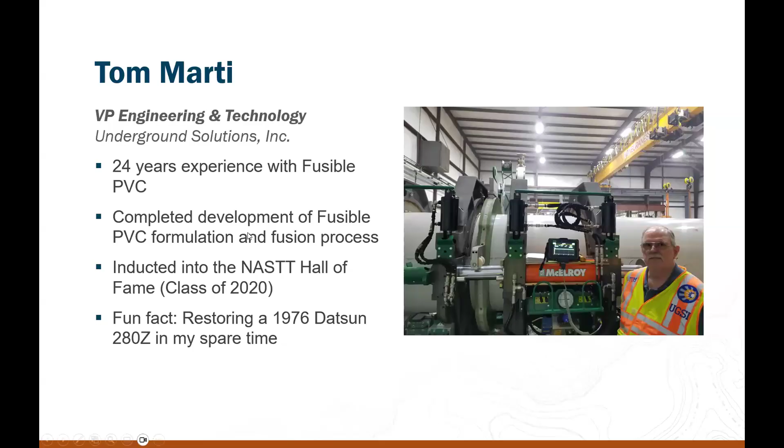Okay, next slide please, April. Tom's also with us. He's Vice President of Engineering and Technology, Tom Marti with Underground Solutions. 24 years of fusible PVC experience, a lot of technical expertise there. He's in the NASTT Hall of Fame, and he's restoring an old Datsun 280Z. That's really cool, so we're excited to have Tom with us.

Michael Garrett is a construction manager with Underground Solutions. First, I guess, is that Michael, is that your first installation? Was in 2006?

Oh, you're on mute. I'm guessing that was your first installation there. So he's been doing this a while. He's from Ireland and plays pickleball.

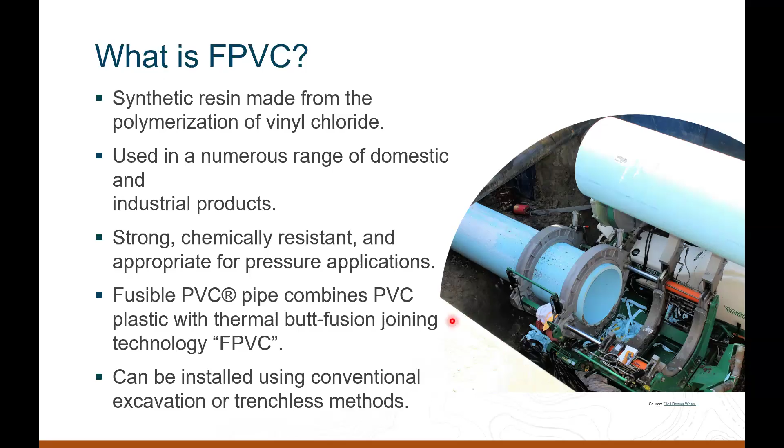So current trenchless applications when it comes to PVC: most applications, if not all, currently are in tension. PVC pipe has over the last 20 years been installed, whether via HDD or sliplining or other installations. It is pretty well established when it comes to its tensile strength capabilities. Most recently, HDD installation and slipline projects of over 7,500 feet in length.

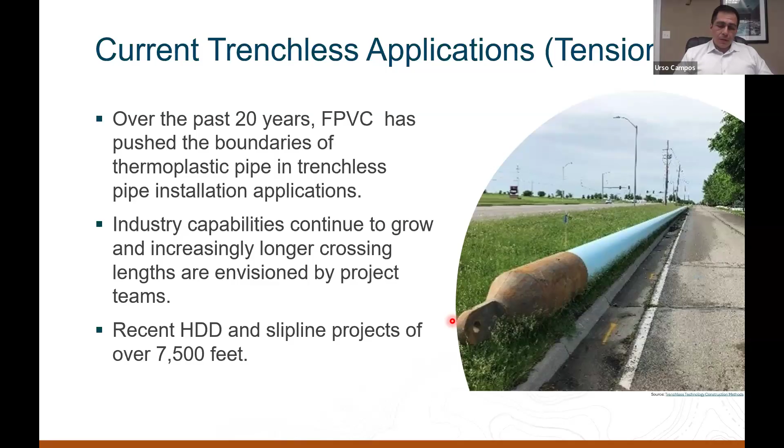So the reason why we're doing this is we know PVC pipe can be pulled, and now we want to push its limits and see if we can actually push it to explore its applications, not only in HDD or sliplining applications, but also in microtunneling, direct steerable pipe thrusting or direct pipe, and also whether a direct pipe thruster can be used in pullback assist HDD applications.

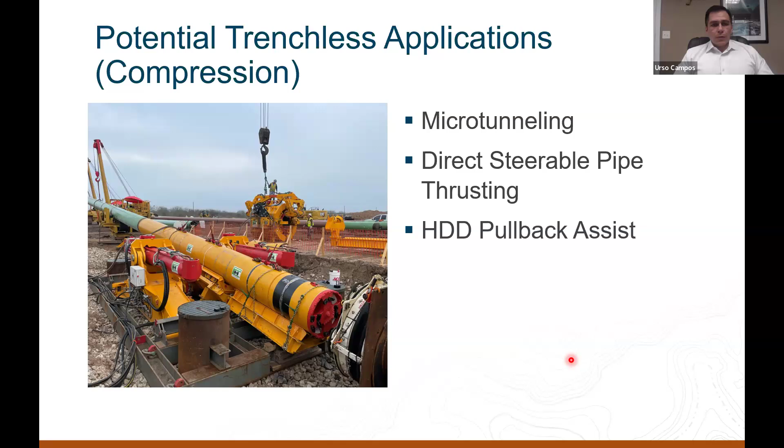So some of PVC's mechanical properties: safe pull stress, 2800 psi, that's again pull and tension. Its yield strength, 7000 psi. Modulus of elasticity, 400,000 psi. Poisson's ratio, 0.38. And when it comes to HDD applications, its recommended bend radius is 250 times the diameter of the pipe, in inches.

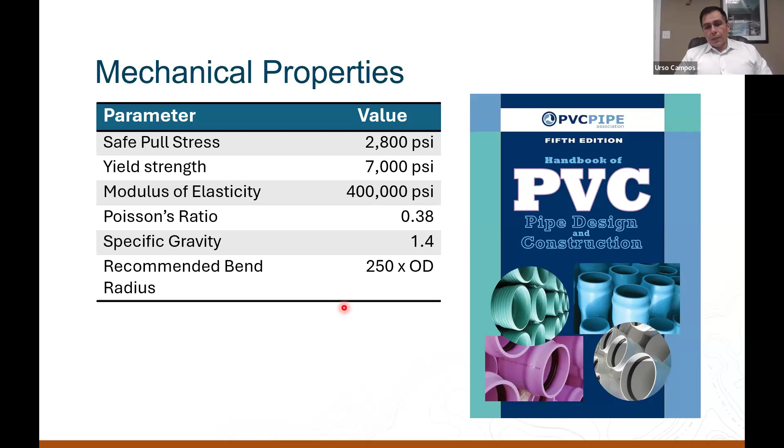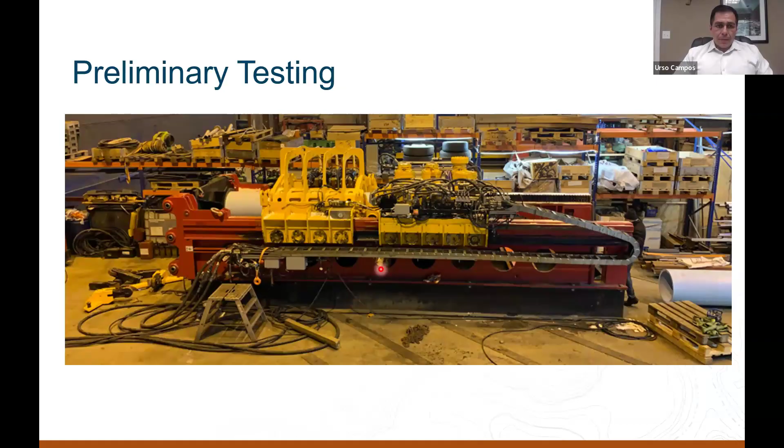As I mentioned earlier, Underground Solutions had already conducted some preliminary testing. They've conducted, as you can see here, full-scale testing of a PVC pipe sample in compression. They've also tested not only the compression of the pipe in its longitudinal direction, but also compressing the pipe using the pipe clamps of a direct pipe thruster.

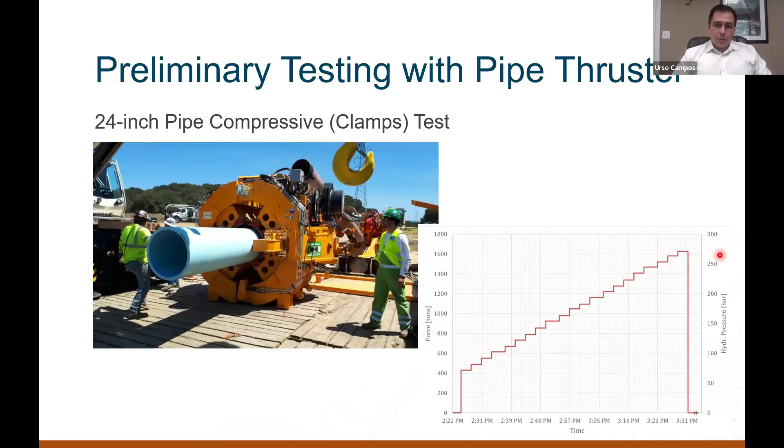Due to the time we have for this presentation, I will not go over in detail the actual testing results, but it's also noteworthy to mention that the testing was conducted on a dry surface, also on a wet surface, and also right on the butt weld of the joint connection between two separate pipe specimens.

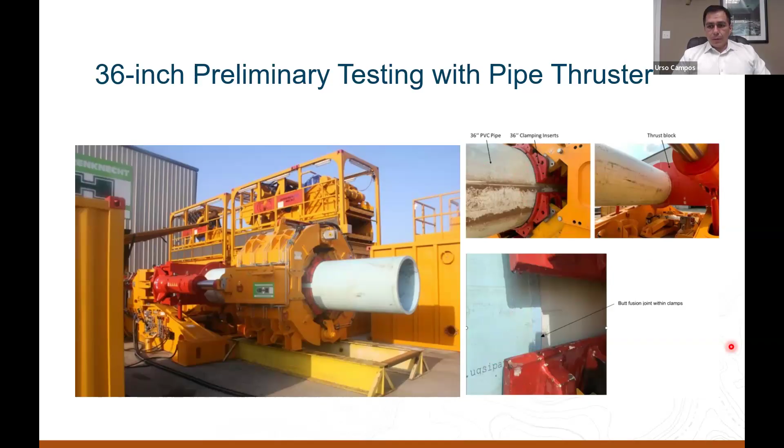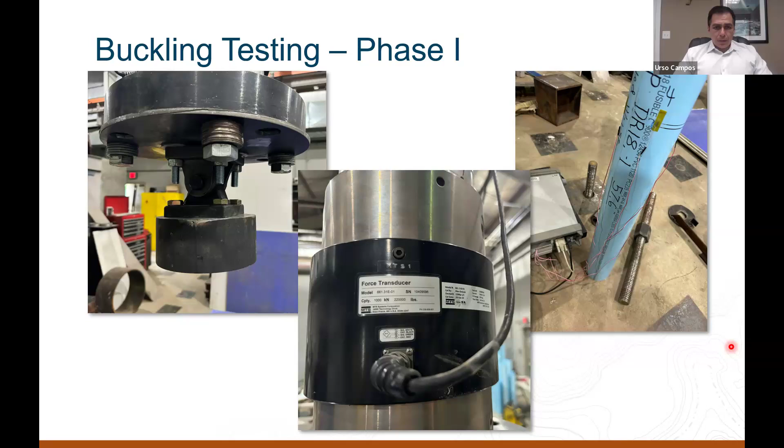Moving on, after we got involved with this project, we proposed to Underground Solutions to establish a good understanding of PVC pipe behavior in compression, just simple buckling. So we reached out to Louisiana Tech's Trenchless Technology Center, and that's where we conducted the simple compression testing on 4-inch and 6-inch diameter pipe samples of different lengths.

Part of the reason we wanted to do that is we wanted to establish a better understanding of the behavior of the plastic pipe in compression before we moved on into more complex analyses and studies. So this is just a refresher on what you would typically see when it comes to buckling of slender members, in this case the pipe.

Depending on your connections, as shown on the previous slide, this one represents a pin connection. We not only tested the samples using pin connections, but also used fixed connections, in a fixed environment, pin and fixed-pin, so that we could look at the different theoretical K values that are plugged into Euler's buckling equation.

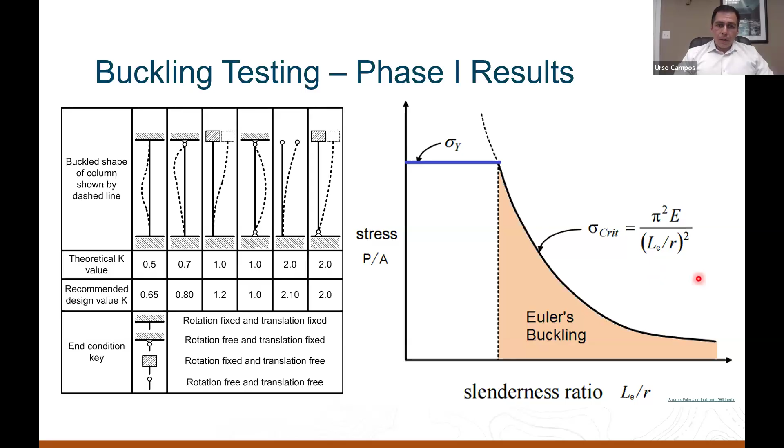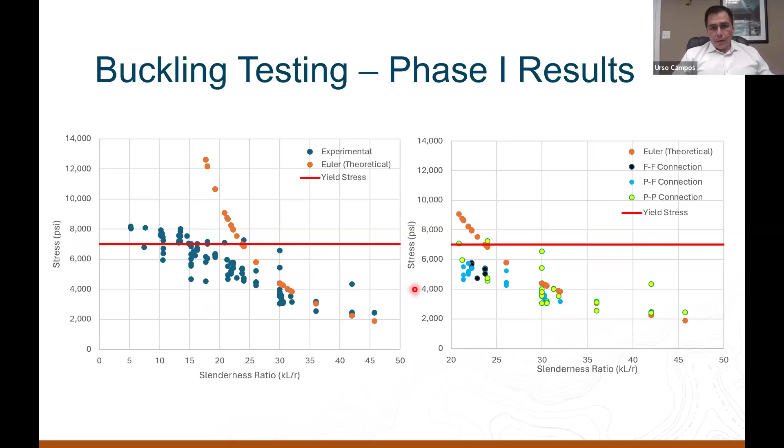After that, we moved on to phase two of the project, which was to not only test the pipe in simple elastic buckling, but actually test the PVC pipe using longer members. This time we had a smaller diameter, either a 4 or 6 inch pipe, that was going to be tested inside a casing, where the purpose was to make that casing represent the underground space or tunnel that the PVC pipe will be exposed to in a theoretical or actual tunneling or direct pipe construction application.

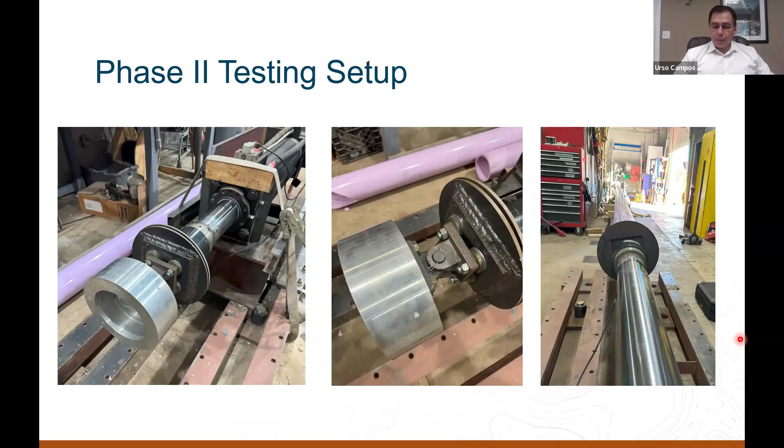Here are some other photographs. This was the very first test that was conducted. The lab quickly realized they were dealing with greater forces than anticipated. After that lesson learned, they went on and increased the number of bracing points along the casing so that they were able to keep the pipes in place and not have it bent like you can see here.

Hey, Urso, just a quick question along the way here from the chat: were tests completed under same or similar temperature conditions?

Yes, yeah, and thanks for pointing that out, John. These were tested at similar conditions, the same location, and all that is documented on Trenchless Technology Center's report that we got from them. All the small diameter testing was indoors, humidity and temperature controlled. Some of the pictures shown earlier of the full-scale testing were outside, in very hot temperature and different ambient outside conditions. So the temperature was controlled, the humidity was also controlled, and all the samples during phase one and phase two were tested at the same facility under very similar conditions.

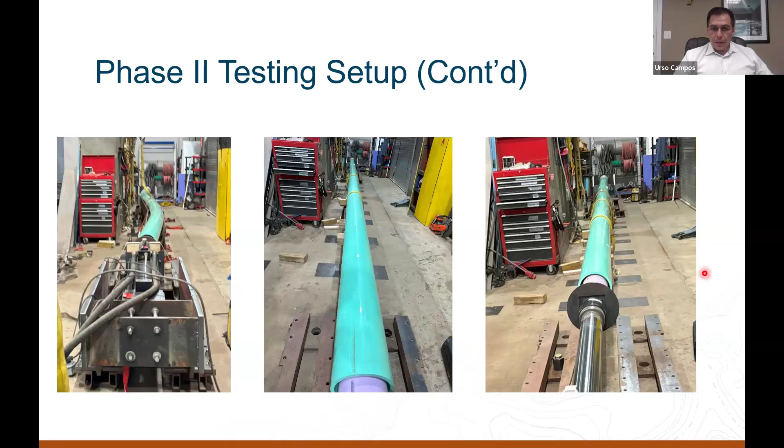So again, just pointing out here real quick, you can see the casing, light blue pipe specimen, and then you can see the actual pipe being tested there in the violet color.

So we tested a total of 16 samples there, as I pointed out earlier. You've got the fixed pin connections, and here are the results.

Here you can see that the testing was completed not at the point where we saw elastic buckling, but where the pipe had permanent deformation, or inelastic behavior. We could see the pipe bending like this with the pin connections, and we could see the pipe actually breaking here on the fixed connections.

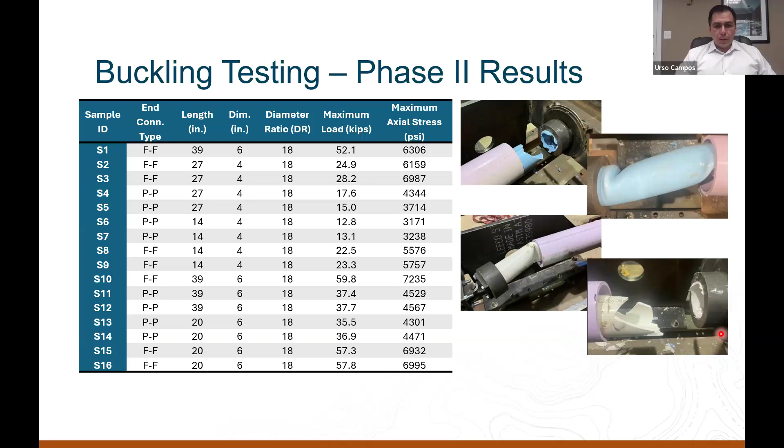That was very important information that we were able to gather during phase two. Not only did it show us the behavior at the end connections, but that information will later be used to better understand how the pipe behaves on the side where you have the tunneling machine, at the leading end of the pipe, and on the trailing end where you have the pipe thruster. Very important information gained during phase two testing.

And here are some of all the results that we got from that testing. You can see the pipe, on most specimens with the fixed-fixed connection, failing roughly at the 7,000 psi yield strength mark.

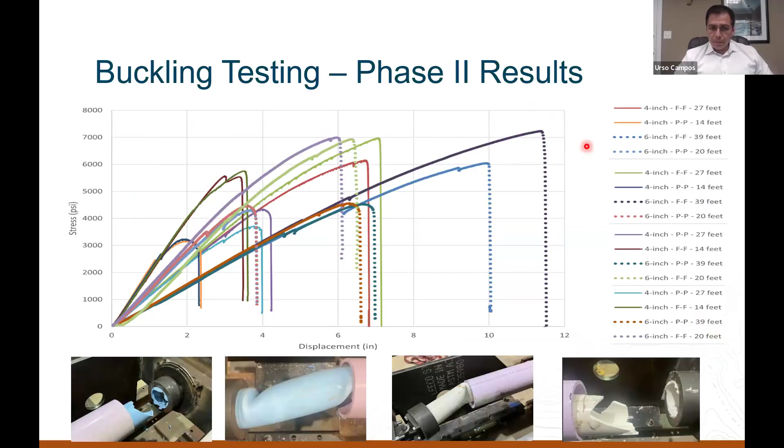So we looked at these numbers, and based on the information gathered from the lab testing done during phase 1 and phase 2, we came up with these projected failure loads. Now, of course, we wouldn't push the pipe to this limit, so some of the preliminary ideas involve applying a factor of safety to that projected failure load. In this case, we're showing the projected failure load in kips and in US tons, and then what that would mean if we apply a factor of safety of 2, in US tons.

So moving on here, then we moved on to Urso - just, yes, Jon.

Another question from the chat: whether a comparative analysis of steel pipe versus plastic pipe can be conducted, as this would provide valuable guidance for interpretation and design considerations.

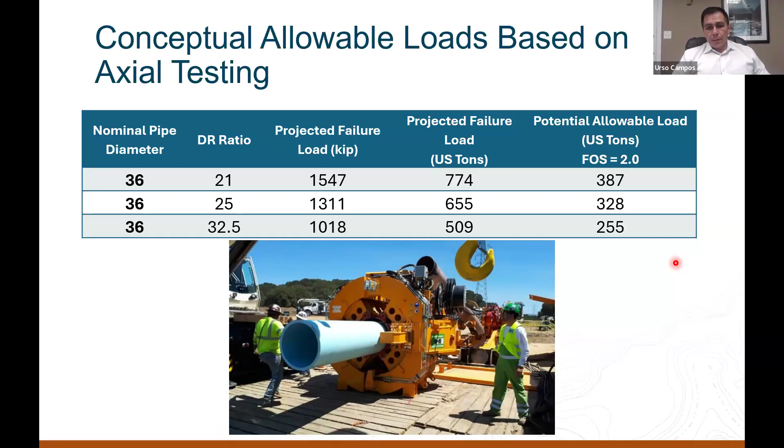Yeah, I think so. I think probably most folks online are aware that steel is much stronger than plastic, and so we're looking into this for other engineering reasons than just a head-to-head comparison.

Right. Yeah, of course. Just as steel has its limitations on the length of installations we can achieve, plastic would also have considerations around its limitations, such as what would be the maximum length that PVC pipe could be installed.

So then moving on to what I would call phase 3 of this ongoing study - an actual FEA, finite element analysis run. Again, building up on our preliminary testing done in the lab, calibrating the models, and having a good solid background, we could move on more from the actual experimental into the theory that FEA allows us to explore here.

So some of the key items here to mention: when we run the FEA, we run a model with a tunnel radius of 3,600 feet. Tunnel length varied from 750 feet to 1,500 feet. We run two scenarios, and I'll show those numbers here shortly - one with pipe length of 750 feet, the other 1,500 feet. Then we also varied the annular space from 3 inches diametrical, and also 6 inches diametrical annular space.

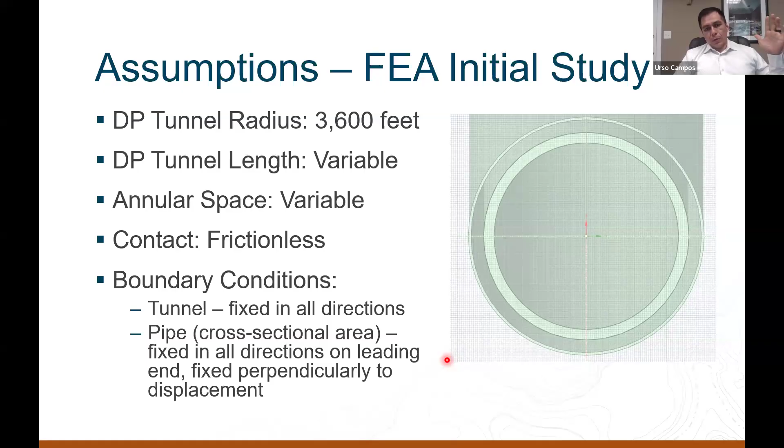And then on the trailing end, the pipe can actually move in all directions, but we're controlling, as you'll see shortly, its displacement longitudinally into the tunnel.

So some of the data I'll show here shortly, or at least the actual force required to install casing, comes from a pretty well-known project in Virginia that involved 9 back-to-back direct pipe installations. Here's a photograph of that.

So here's the data from that particular project, and just to point out, that data was provided and is being presented or used per the owner's permission.

As I said, we had 9 paths or 9 installations. Here are all the crossing lengths, very similar, roughly 1,800 feet. And here you can see the maximal total thrust force it took to install each one of these casings for this particular project. Most of them were in the neighborhood of 120-150 US tons, but we saw up to 340 tons of force, or 680,000 pounds.

Here are some details about the casing installed at these projects, which was a shore approach: 42-inch diameter steel pipe, wall thickness of 0.72 inches, cutting wheel diameter 44.75 inches. So there you have roughly a 3-inch annular space, or actually here, a radial space of 1.375 inches.

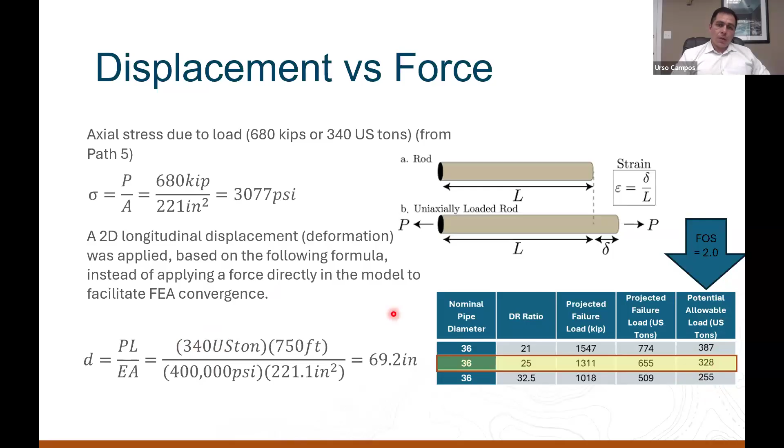On that subject, we have a couple of questions in the chat about the installation loads, the variability in the installation loads.

My recollection was the ground conditions were very similar - of course you'd expect that, shore approaches, 9 of them sort of splayed out into the ocean from a single pit. So the ground conditions were very similar, the lengths were very similar. The limitations on that particular steel pipe were the limits of the machine. So there wasn't a great deal of concern at any of these loads you see on the screen, or even going higher.

My take on it is that it had a lot to do with how the machines were operated, and when the contractor was trying for a little more production or whatever. But again, these loads were so far below the tolerances or allowable loads that there was no concern about 340 versus 215 or whatever. They're all below, as I recall, 750 tons, which was our limit on both the machine and the pipe. So hope that's helpful - there was no smoking gun geotechnical condition that caused that, at least that I'm aware of.

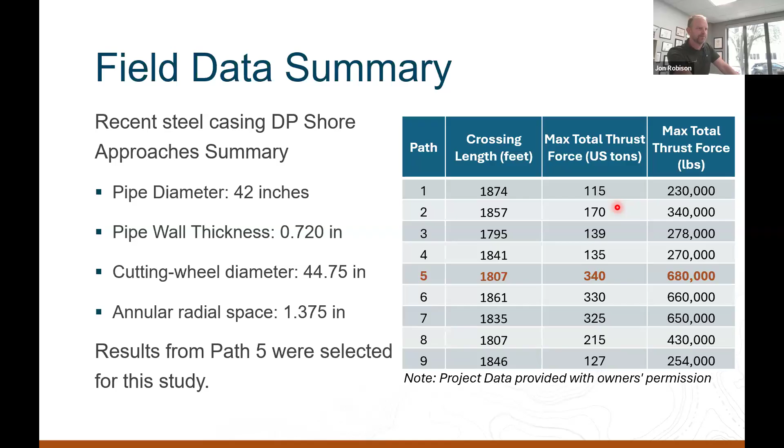Okay, so as I mentioned earlier, these are some of the FEA results. Here are some of the inputs: 750 and 1500 - this should be feet, not meters, sorry about that - and then 70 inches and 140 inches in displacement.

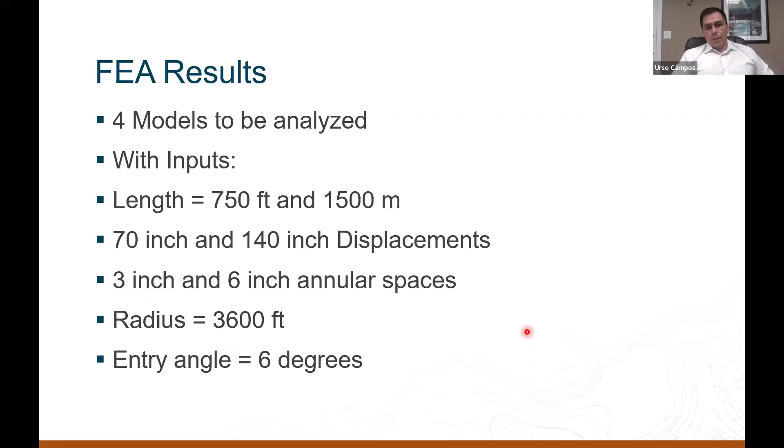This 70 again comes from here, we just rounded up this number to 70. And if you double the length, in this case to 1500 feet, you're doubling the displacement, so that's where that 140 comes from. We had a difference in the annular space of 3 and 6 inches. The radius we used was 3600, and the entry angle was six degrees.

So here's a simulated result, the video of it. I might have to get rid of the pointer, I believe. Yeah, there you go. So here, before I run this animation, let me just point out that this one is for the 750-foot sample with 3 inches in radial space.

And what you're seeing here is the maximum stress, 4,000 psi, which is roughly a factor of safety of 1.8, considering that the yield strength of PVC is 7,000 psi. And again, just a quick summary or refresher - this is a 750-foot segment to which we're applying 340 US tons of force.

What you're seeing here is only the pipe. I hid the tunnel so it's out of the way of the simulation here. You can see that gradually being pushed, and obviously this is exaggerated so we can point out the deformation. Again, this is the animation here.

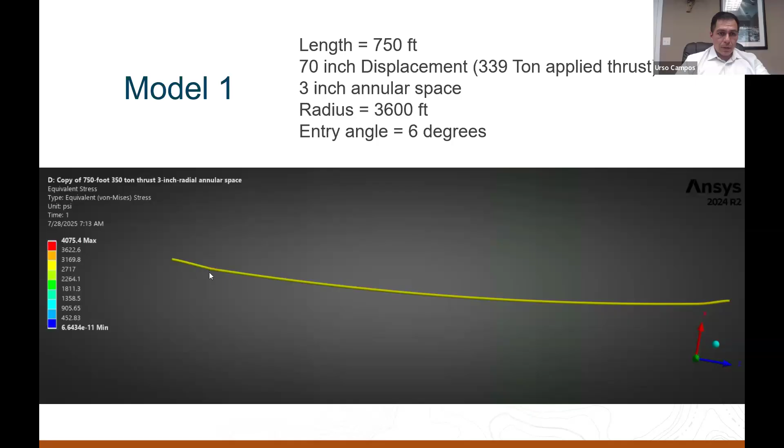But those are considerably exaggerated, correct? Yeah, exactly. These are exaggerated, and again, pointing out the stresses, per the model these did not reach the yield strength of the pipe. And here again, just a zoom in of the areas in question, pointing out that the actual maximum observed stress was at the boundary condition.

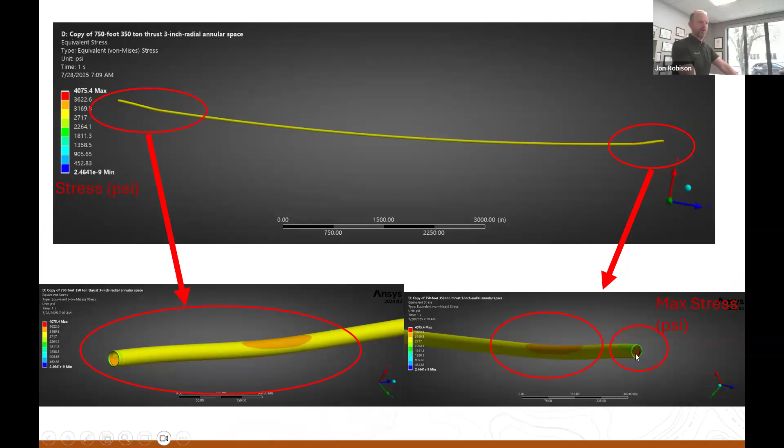Just in summary, we need to run additional models using friction. Also, we saw no inelastic stresses observed on the FEA. Von-Mises stresses up to 61% of SMYS.

So we applied this displacement. The results from the FEA yielded 339 US tons of force. So the mechanics of materials equation that we used was fairly accurate with that.

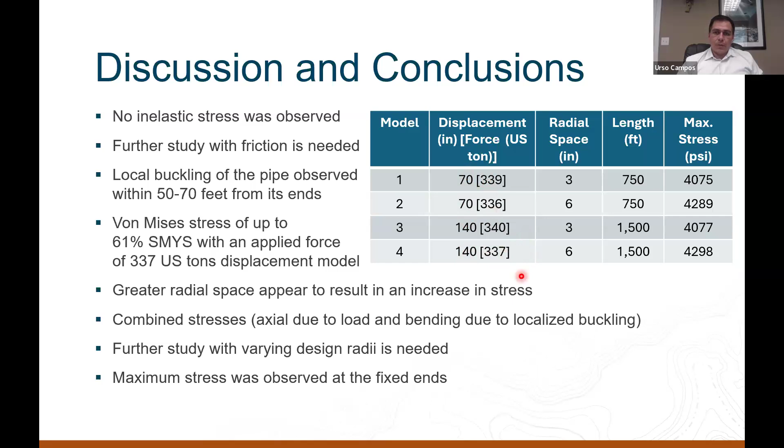If you started with 340 tons or so, I recall you doing that, and the model would just continue to run endlessly. It wouldn't converge, because the question would be asked, why not try running it with force? We did, but it wouldn't converge. Thanks for pointing that out, Jon. This 70, 70, and 140, 140 are just means to the end of getting these forces applied to the pipe.